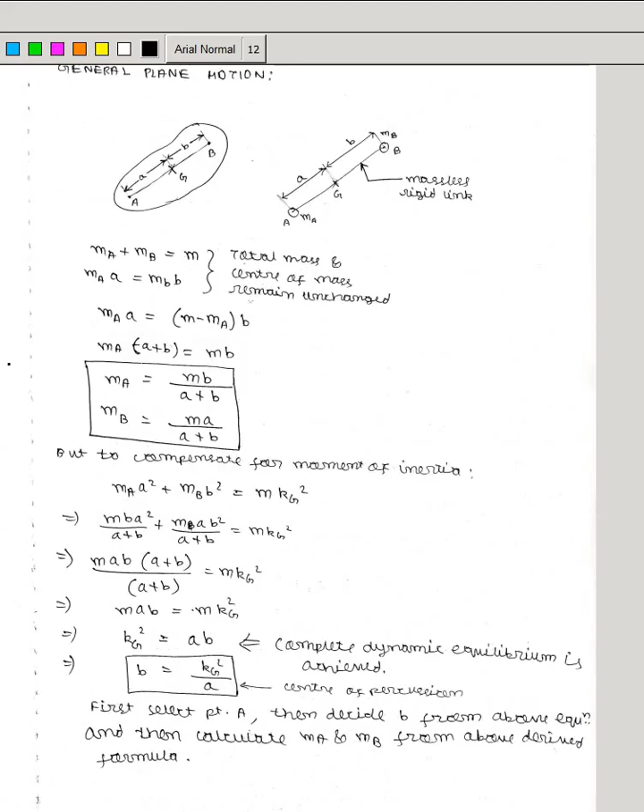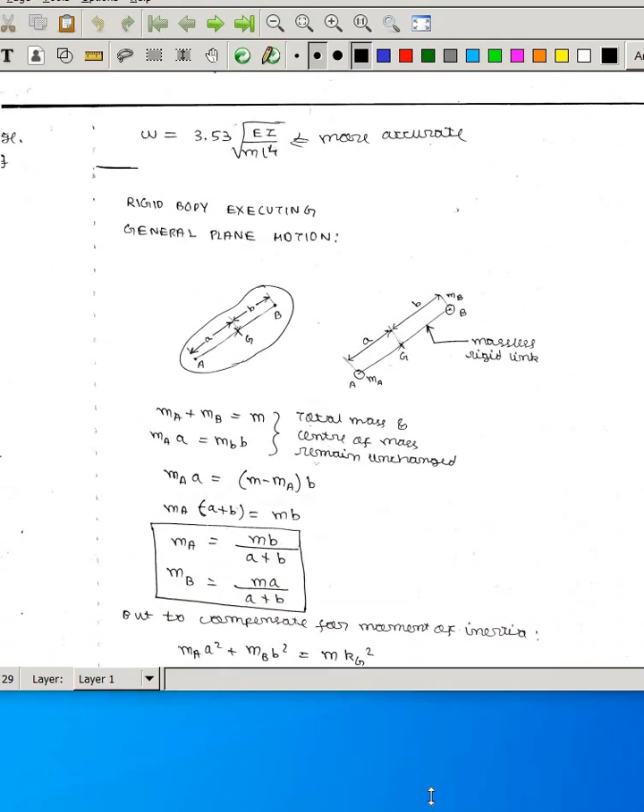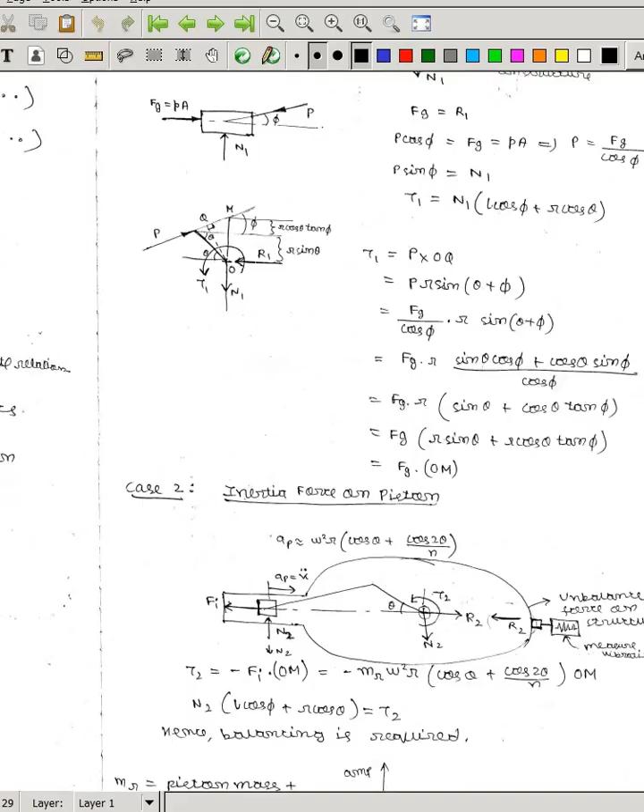connecting rod, crankshaft, then this unbalanced force is mr omega square r cos theta for the primary one, and cos 2 theta by n for the secondary one. So we are replacing this inertia force by a centrifugal force, with the understanding that the horizontal component of the centrifugal force is equal to the inertia force.

So we are putting a mass mr here, which is rotating at omega. So again the centrifugal force is mr omega square r, and the component along this center line is mr omega square r cos theta. So in place of this we are putting a mass here. That means the centrifugal force is along the crank.

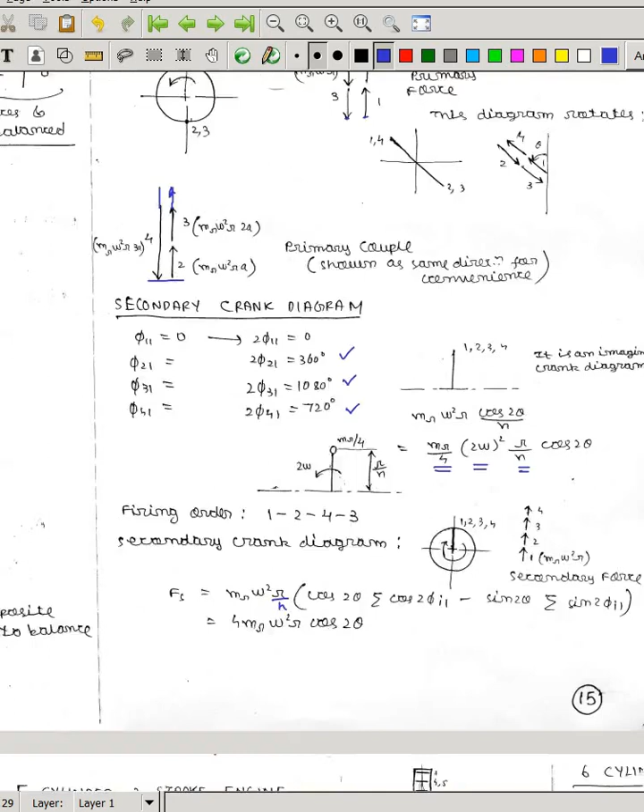And if you just draw the couple diagram, then what you have to do is draw the same diagram, only it is multiplied by mr omega square r by n, and it is multiplied by a.

Then the next one, the same thing, multiplied by 2a, and this is actually for crank number 2, this is for 3, for 4, because you are taking the left one as the reference plane, and for crank number 1 there is no moment. So 2, 3, 4: twice a, thrice a, so 6a m r omega square r by n cos 2 theta is the secondary unbalanced couple. So in this way you can just draw the diagram and check the state of balance.